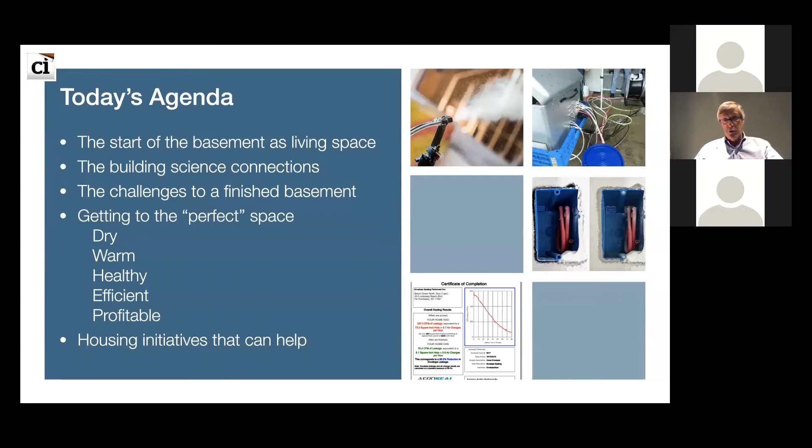That'd be great. So I thought I'd start with, and I have the wrong slide up, my apologies. But in terms of today's agenda, we're going to start with where we started with basements as living space, some of the building science connections, the changes to finished basements, the challenges to finished basements, and getting to what we'll call that perfect space: the dry, warm, healthy, efficient, profitable space, and maybe some of the housing initiatives that can help you with that. We'll work through these items in the next 40 minutes or so.

I always like to remind folks, what were we really starting with? The goal, of course, is to get us to solid, stable ground. That's where we'd like to get to. That means we need to know a bit about the soil capacities, a bit about the soil types, and there's been lots of research on that over the years.

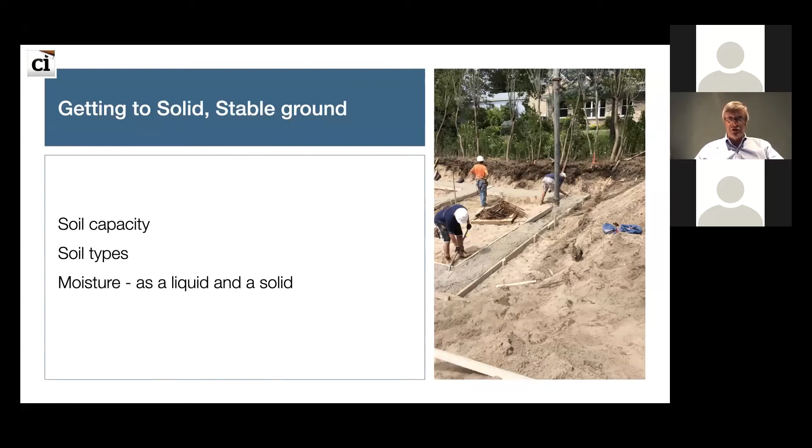The one I'm going to key in on, for hopefully obvious reasons, is moisture, both in liquid form and in solid form. Moisture really is a controllable risk, something we can manage, and it's very valuable to think about for the long-term success of livable basements. I'm not a structural guy per se, but I can certainly help you with the structural problems associated with moisture that we want to think about.

It all starts with this conversation of why did we dig the hole in the first place? Frankly, it was frost protection. More definitively, it's water that's turning into frost. Water, when it freezes, expands by exactly 9%. You have these soils, water in soils, the water expands, and that puts tremendous pressure on any immovable objects, or Mother Nature doesn't see them as immovable, but these objects called foundation walls, foundation slabs. Interestingly, although it expands 9%, it can actually move soils more than that through an effect called lensing, the way frost is built in the ground. I'll show you a slide on that in a second. So it can lift soils easily a foot or more.

Some of you may actually be in expansive soil conditions, where you get a similar effect with moisture—not when it freezes, but when it comes into contact with specific clays that absorb that moisture and also expand, in the order of 6 to 8 inches. People have seen that in Denver and other locations. So this idea that moisture in liquid form is our enemy, and moisture in solid form becomes an extra 9% we have to worry about, and the impact that has—that's why we dug basements in the first place.

We really have two strategies to control that impact: one, control the water, or two, control the temperature of the footings so they don't freeze. That's the history of digging the hole. Typically we find ourselves doing both. We think about surface drainage to minimize water, that impermeable cap to flow water away, then promoting free drainage below grade. And of course, a great partner on this call is the expert in that.

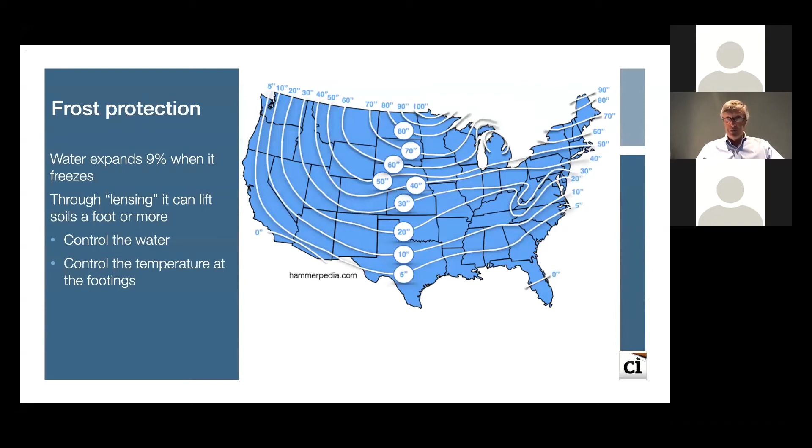Dirt has an insulation value, and that value changes a little depending on the soil and the compaction. Highway ministries publish these kinds of drawings because they're interested in frost heaving underneath highways and worry a lot about soil compaction. Typically, if I could put a number on it, it's about R2 per foot. So if you have 5 feet of dirt and the frost line is 5 feet, you're basically protecting your footings with R10 of insulation. Hopefully you find that interesting if you haven't heard it before.

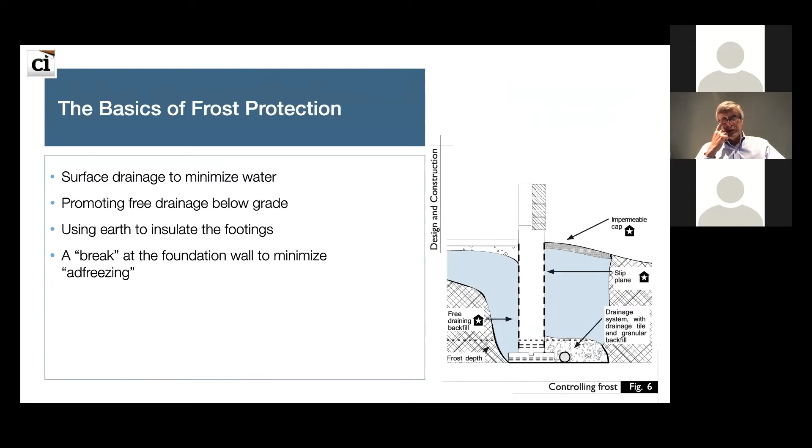Managing the water and thermal performance at the footing level doesn't necessarily cut it. You also have to worry about freezing, where ice on the above-frost-line portion can actually adhere to concrete and other materials and push it up, pull it up. That's called adfreezing. Here's a little example of that.

So you have these two combinations of adfreezing and ice lenses. The lenses exacerbate this, much like a lens focuses light at a focal point. The ice lenses focus these vertical forces and can actually move that soil more than a foot.

So we have to think about water in liquid form. We also need to think about slip planes to keep that frost away from the foundation wall so it's not pushing up on it. Water in solid form is a big problem for us in northern climates, and I'm assuming everybody on the call is in a northern climate tied into basements. If you're from the south and still doing basements, fine, you still need to worry about water in liquid form. But for the moment, I'm thinking about water in solid form, ice, and the damage it can do.

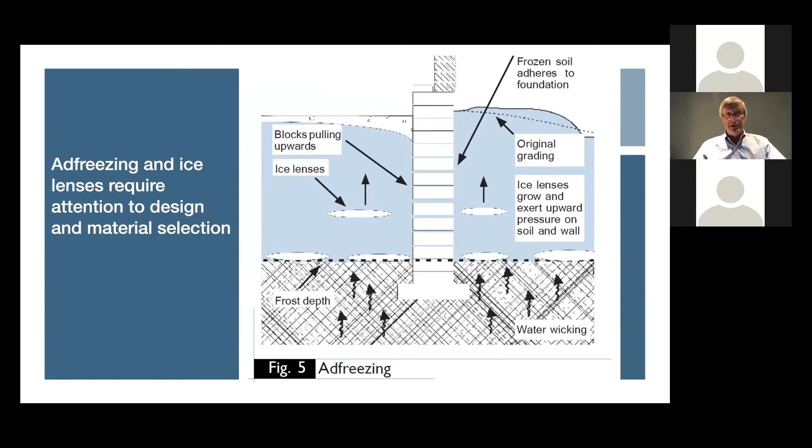That's historically why we went below grade. That's why we dug the hole. Of course, once we dug the hole, we found other uses for it.

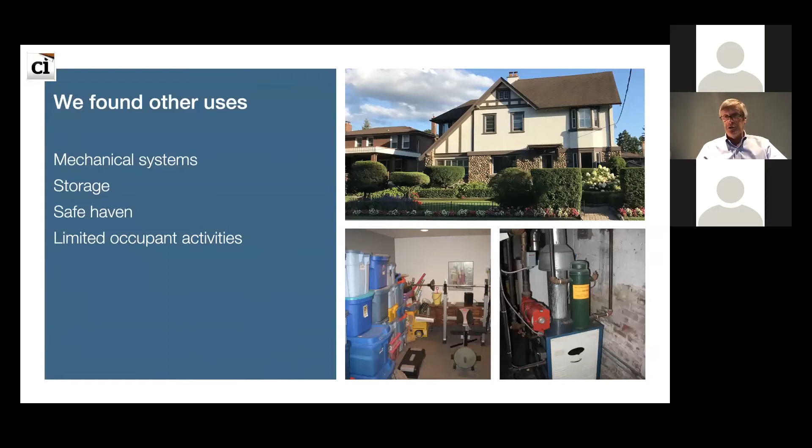So when you think about how we've struggled, or at least challenged ourselves, to use basements, could we do a better job? That's really what this session is about. And of course we have these new expectations: everybody imagines this living space with incredible finishes, ambiance, lighting, drywall, all the materials you might want to put into a basement now. We want it warm, dry, bright, healthy, and frankly adaptable, probably even more adaptable than above grade, because every customer wants something different.

Some want to put renters down there, some want pool tables, some want theater rooms. So we have to build or think about those basements, even if we're not finishing them. We have to imagine ourselves, imagine our clients, and what they're going to do with that basement over the years.

And probably a wider range of uses than most of the rooms upstairs that we have to think about. So those new expectations are pretty powerful. And when you think about your risks as builders, as architects, as contractors, it's all about water because we're below grade.

But then there's this comfort element. Certainly in northern climates, frankly in all climates, we're below grade, which means we're constantly damp and cool. The soils are cool, the soils are damp, so we have to think about comfort in those spaces. With my brother's house, they're not spending extended periods of time in that basement doing very limited activities. But with this basement, people could be there for extended periods, and therefore their expectations of comfort go up.

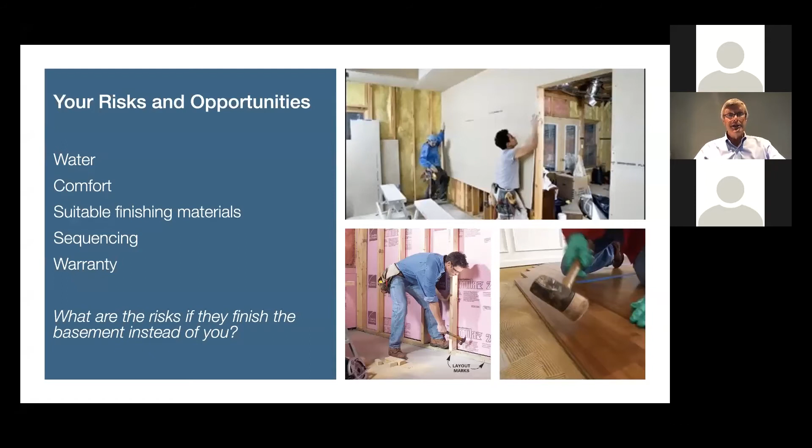So, risks and opportunities. Going back to the building science connections, you'd recognize the terms air, heat, and moisture flow. For this conversation, we need to think primarily about moisture. Yes, we'll talk heat flow, but the single biggest issue, as I already mentioned when we looked at the drawing on the right, is the number of moisture sources.

We're at great risk 24 hours a day. Above grade, there are many, many dry days—in fact, we haven't had a drop of rain for the last three weeks in my marketplace. So above grade walls, we're laughing. But below grade walls are still subject to moisture issues because that moisture in the ground is there all the time. So many moisture sources we have to worry about in that scenario.

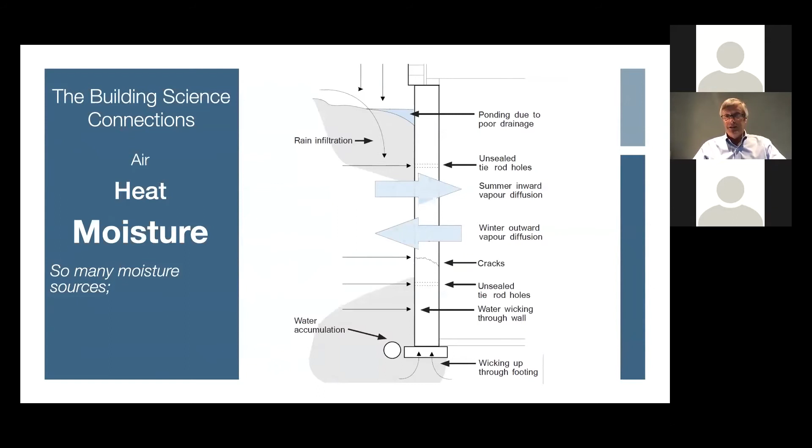And so the code has addressed that. The code says we have to think about moisture migration, and it basically looks at two items. One is damp proofing, which is primarily to stop capillary flow through porous items. We've chosen to use concrete, or concrete derivatives, in almost all basement and foundation walls.

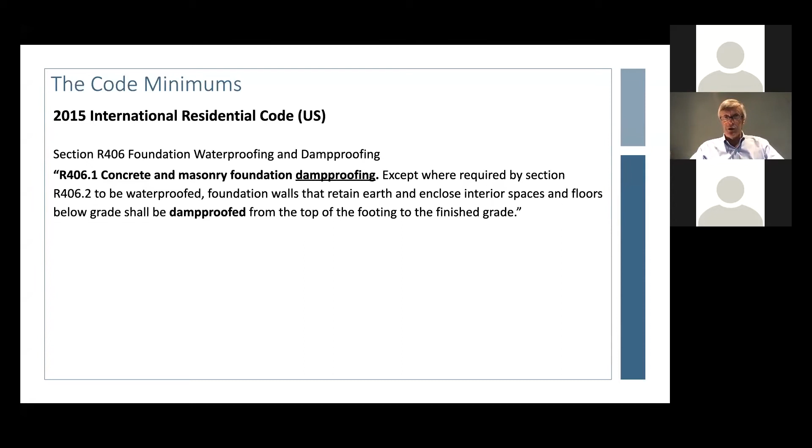Concrete wicks water, and we'd like to manage that. The concrete itself doesn't really mind the moisture, but we don't want it drying to the inside, so we're required to put up damp proofing—that's U.S. code, and I'm sure for Canadians on the call it's very similar wording. I'll be very blunt: this is the minimum. The minimum you need to do is stop the capillary flow coming through that basement wall. That's the important thing to keep in mind.

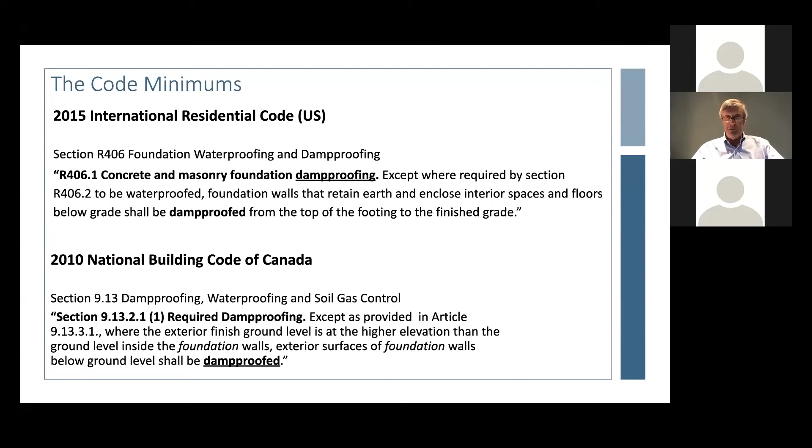In the building code, the IRC says if you're in high water tables or severe soil water conditions, you need to go further than that—you need to waterproof the wall, a different terminology than damp proofing, using some mechanism for stopping liquid water flow through cracks and so on. Interesting that it's not a requirement in all locations, just where high water table or other severe soil conditions are determined.

In Canada, we've done something slightly different. We recognized back in 2012 that damp proofing wasn't enough, because that year we started requiring full height basement insulation. The code officials and building industry realized that simple damp proofing wasn't enough to keep insulation systems dry. So in addition to damp proofing and waterproofing options, they suggested foundation wall drainage systems as a preferred methodology. Virtually all builders in my market, heavy clay soils in Ontario, Canada, about 50,000 houses a year, 90% of them use a drainage system such as Delta MS. You'll be familiar with that. Delta MS is code approved from a drainage perspective.

So the minimum is damp proofing. And I'm going to say to you, it's no longer good enough because you're insulating and finishing basements. If you're not finishing, your client is finishing basements, and it puts you at risk. If all you've done is stop capillary flow, you haven't gone to the extent you really need to. Code's not enough because there are so many moisture sources.

If I cued you in on this slide, when you think about damp proofing, which of those would simple damp proofing actually stop? Frankly, the summer inward vapor diffusion about a third of the way down, okay, I guess we could stop that. The capillary water flow through that wall we could stop, but it wouldn't necessarily bridge cracks or unsealed rod holes, as you see there. It certainly wouldn't stop water wicking up through the footings because we don't put damp proofing there. And it wouldn't stop liquid flow getting through cracks from rain infiltration and so on.

So capillary flow, damp proofing, is a minimum requirement. And then we need to think about doing a better job. That's where we think drainage is a more appropriate answer when we look at how we're upping the ante with respect to how basements are going to be finished.

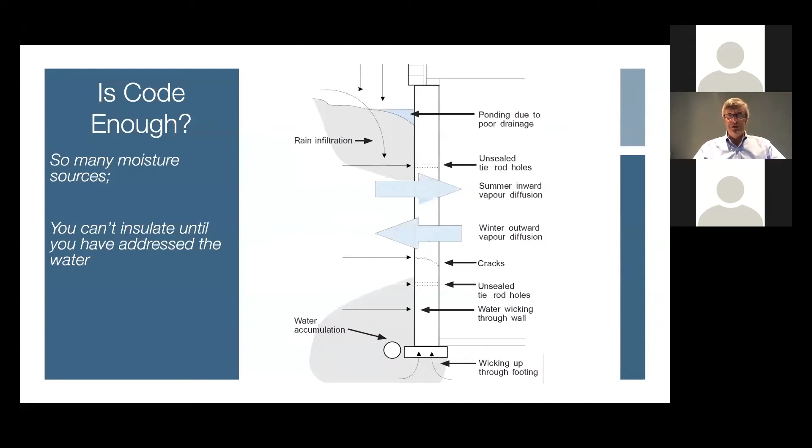I'm going to use this statement: you can't insulate until you've addressed the water. This was a phrase we often used. We were doing indoor air quality audits for a housing authority here in Canada, and we had to tell people in their basements that they should not use their basements as living space. This is an existing basement. They should not use their basement as living space, they should not insulate their basement wall. I've told my brother Jim, do not insulate those basement walls. They are not suitable because you haven't managed the moisture in those walls.

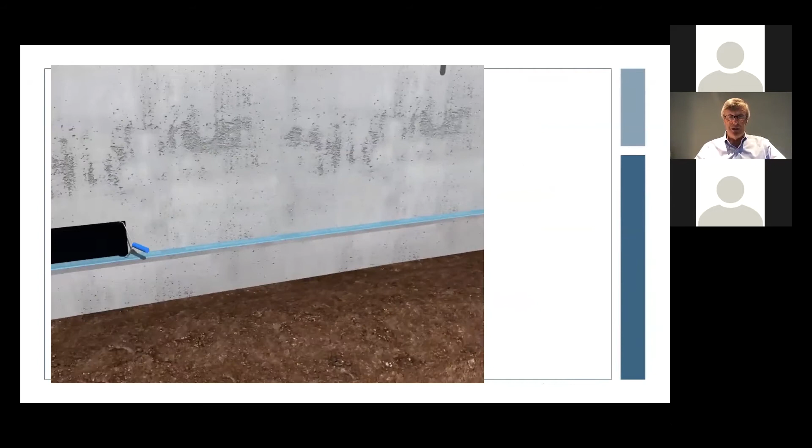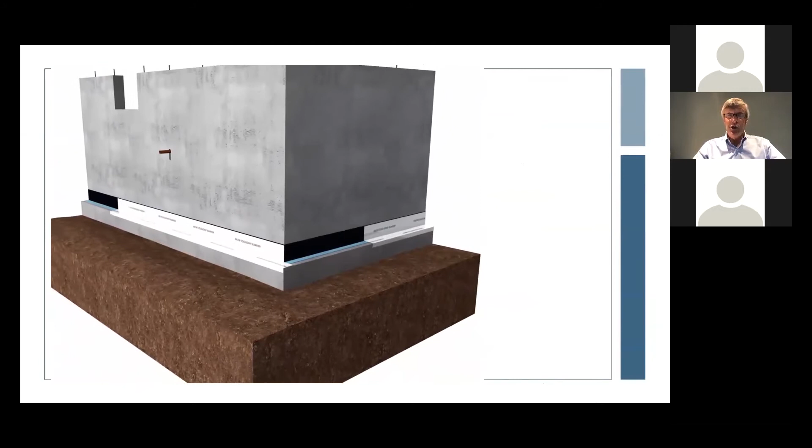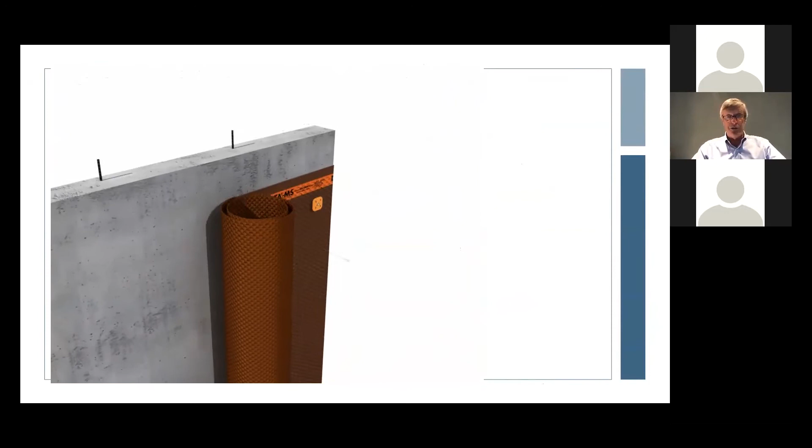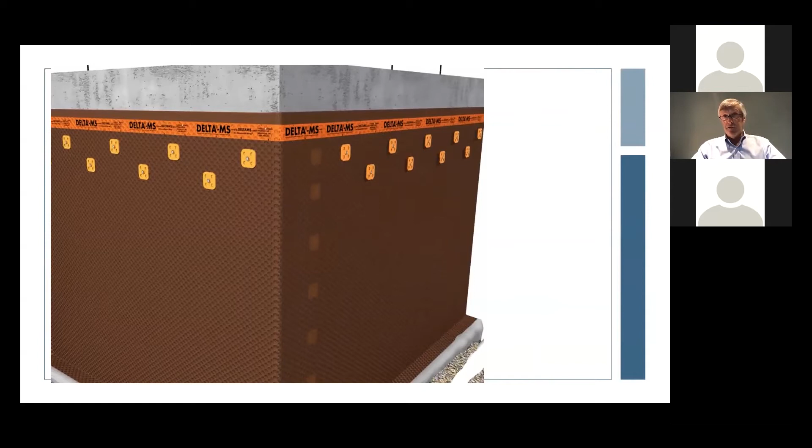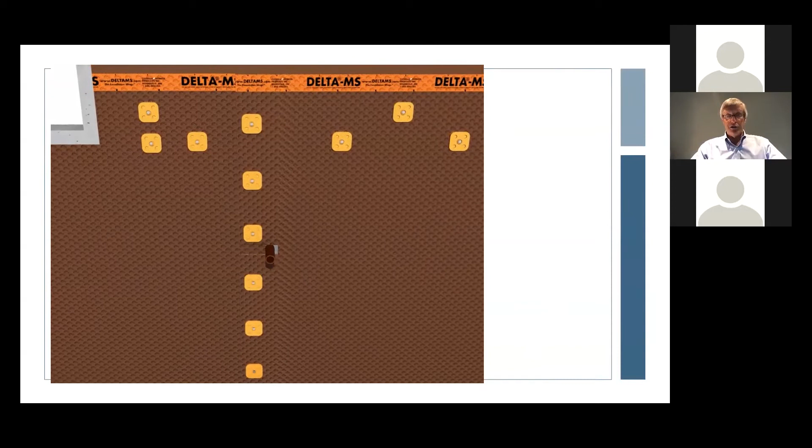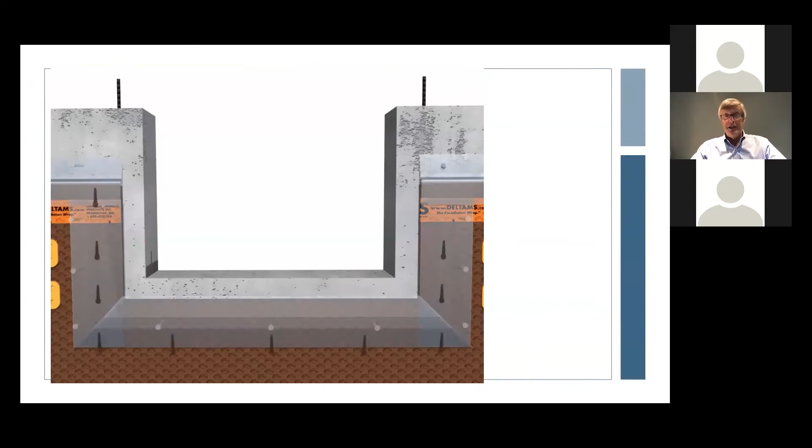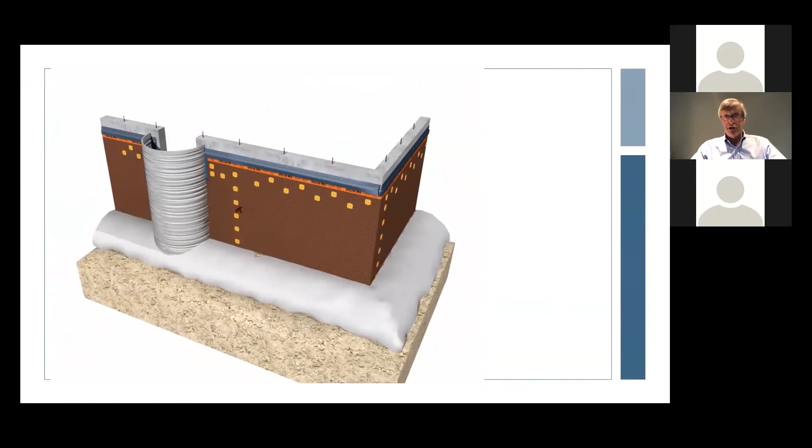Interestingly enough, we know concrete cracks. That was one of the major studies done in Canada years and years ago. The study came back saying concrete cracks, and we're like, yeah, of course it cracks. There were two ways to solve that: one was to try to stop the cracking or fix the cracks, the other was to do the drainage. We realized that holes in the concrete aren't a problem if it's easier for water to drain down than it is into the wall. So this comprehensive drainage system you're seeing here directs that water away to the footing.

Peter: Well, first of all, thank you, Gord. That sounds very Canadian to do a study to find out that concrete cracks. Attaboy, we probably have a study to find out that water's wet as well.

Yes, exactly. So since you're on the topic of foundation walls, maybe you could comment on using this when you're not using a poured concrete wall. Sometimes there's ICF and sometimes there's block. Thank you for that.

Block is even more susceptible, even more important. There's inherent holes in the concrete block, just the mortar joints and so on. So it's absolutely vital that we get a drainage layer on there.

And so you would still put a drainage layer. Rather than fiddling around with a damp proofing layer that you don't know if it's compatible or not, or a peel and stick on an EPS foam isn't compatible, I actually prefer drainage layers. Even more important to apply drainage layers onto ICF. And then you've got yourself a really well insulated, water managed foundation.

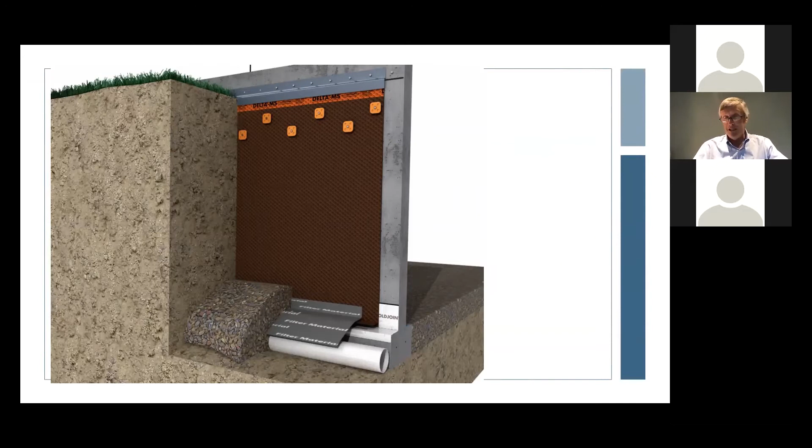So thanks for that question, interjection, Peter. That's very helpful. So this idea, when you think about solving the water issues, all of the water sources, now you have protection against all of them. You stop the capillary flow coming up from the footings. In this case, you're seeing underneath the slab as well, stopping that capillary flow, vapor flow. You've got drainage on the outside, which means any liquid water is drained down to the footing drains, and you've stopped the capillary flow through the walls.

So now that you've done that, we can get ourselves with these very simple, effective investments. This happens to be the house that I'm sitting in, the footing barrier being applied to that footing. And I found it pretty interesting. The contractor who'd never used it before wanted to feel it. What's going to happen with this product? If you haven't tried this product, seen this product, I think it's a pretty brilliant product. Very simple to apply. We've shown it in other sessions, so I won't go too far into it.

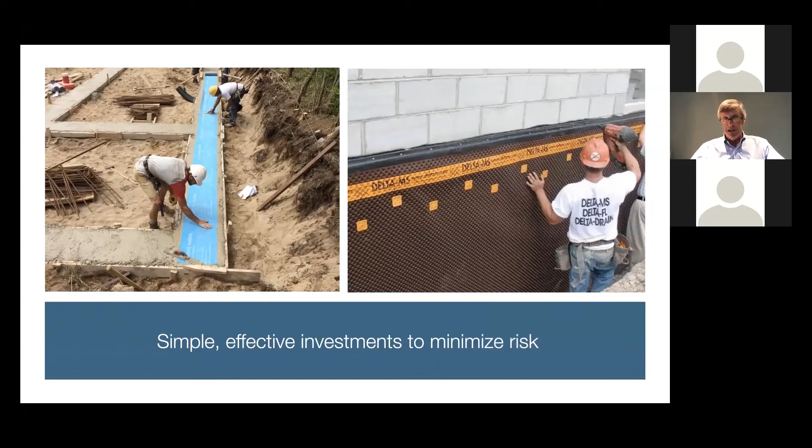But my point here is, there you can see on the block wall, on the right-hand side, the idea with these very simple investments, very early in the construction phase, now you get yourself covered for the rest of the build. We use that tagline, solid foundation for a solid structure, a solid start. And this gives you the confidence that now I can go almost with impunity and do whatever I need to do, want to do in that basement, and provide really nice livable spaces. So that's really the key.

And then as we move, we've solved the moisture. Solved is perhaps too strong a word. There are still going to be soil conditions, still going to be situations where you have to go to greater lengths. But for the most part, for most of the builds, those two simple investments really help you from a moisture management perspective. And now we can think about optimizing insulation.

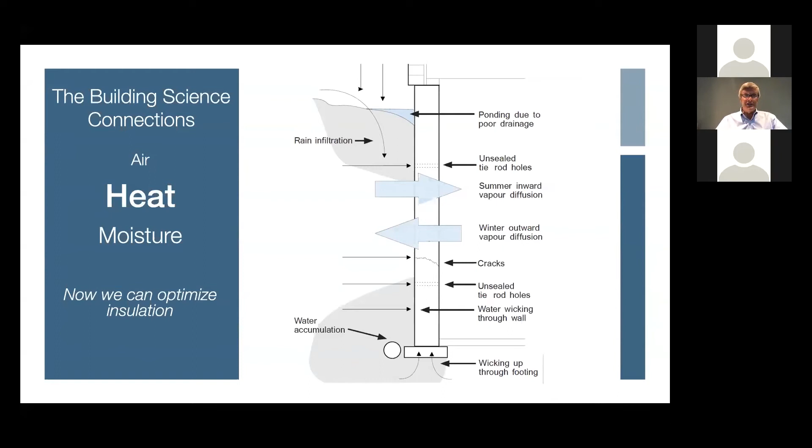And you might fall into the trap. I know people on this call are educated enough that they would understand this isn't a case of people always thinking that heat rises. Well, it doesn't rise, heat moves from hot to cold. And there is heat loss through a foundation. These figures, by the way, come out of that study I mentioned, a big study that was done back in 2005 and a precursor to that in '97. But this idea that the heat flow goes from the left through the house, through the slab, down through the soils, out to the cold spot, which is Mother Nature. So we just need to get our understanding right.

And interestingly enough, when you think about that heat flow, it gives you opportunities to solve it in different ways. We don't really care where the insulation goes. It literally could go under the slab, on the interior of the foundation wall or frost wall, on the exterior of the foundation wall, or even horizontally below grade, just under the grade on the right-hand side. So we just need to impede or stop that heat flow.

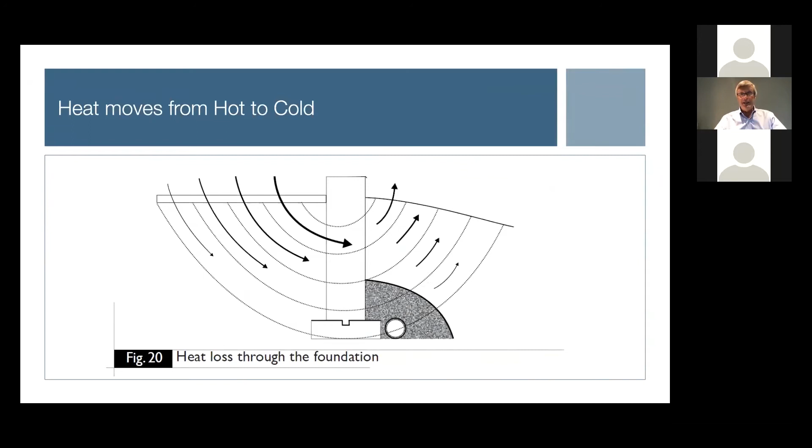And remember, dirt itself is an insulator, about R2 per foot. Of course, we have much better insulators than that, insulation at R5, R7 per inch. So let's go ahead and be more effective than Mother Nature at stopping heat flow from our basements. It's a fairly simple little drawing. And if you're wondering, does it mean a lot? The answer is yes. If you notice in a HERS index, this is US, a HERS rating, HERS index house, a typical house in a cold climate.

In a cold climate, I'm talking climate zones 4 and above, basements account for 25% of the total heat loss of a house. And even when you drive down to a lower HERS rating of, say, HERS 50, typically builders don't do the basements. They do everything else first. They get the air tightness done, they do better walls, they do better windows, but they don't necessarily take the right stab at basements. And I'm going to make a case that basements are the most cost-effective place to insulate.

As long as you've done the water management first, basements are the lowest risk, lowest cost way to bring down the HERS score. It's not the only thing you would do, but somewhere along the line, I'll actually show you how much insulation to add to make this work for you.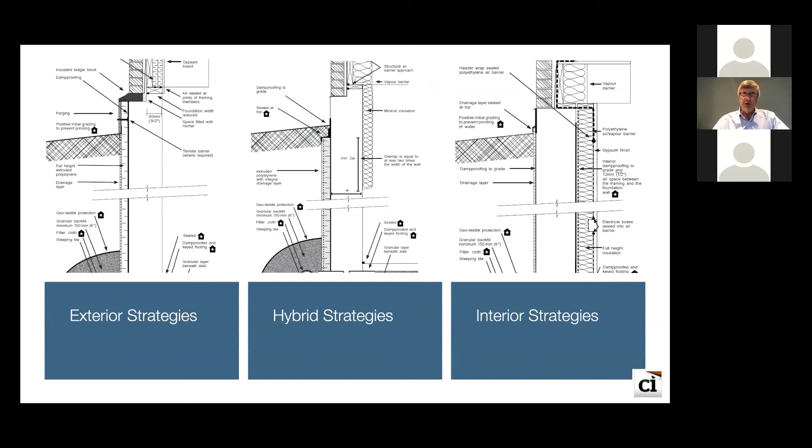Minnesota very clearly went towards exterior insulation, and we can learn from that. It's a great opportunity to think about where is the best place to put the insulation. If you're worried about sequencing, worried about whether this is going to impact the further construction of your house, if it's all done on the outside, you do that before you backfill and you're good to go. You've got things done, so it can be really helpful.

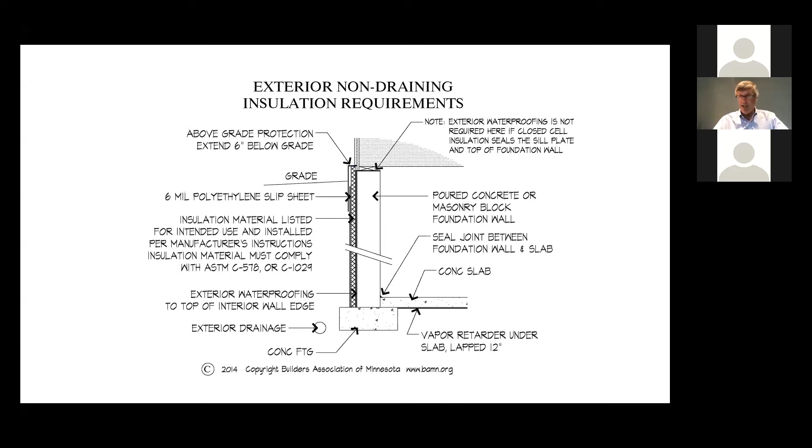This is actually a drawing from Minnesota, copyrighted by the Builders Association of Minnesota, showing how you do exterior insulation on the outside - R10, R15, depending on what section of the code you're working under. The issue always becomes, how do I provide above grade protection? And they have various strategies to do that. I'll highlight that in just a second.

I prefer the foam products on the outside with a specific drainage layer. What's really nice here, it keeps the concrete warmer from a comfort perspective, a moisture perspective. That's always nice. It helps reduce water entry because of the water management layers that we have. Some would say it's a challenge to finish above. We do need to think about that thermal bridge down at the bottom through the footing - what are we going to do with that? There's still a thermal bridge there, but that ends up being a relatively small portion of the heat loss. Even in a net zero building, you might not need to attack that.

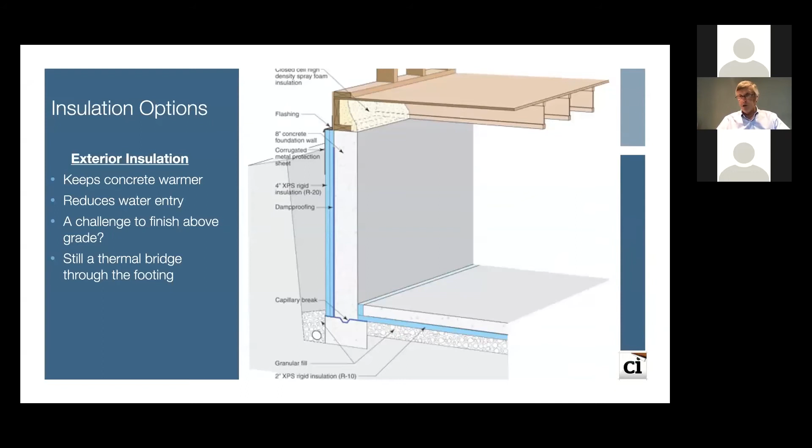Now, if you're in Alaska or something, it might be different, but that tends to be a really good option from the outside. We often get asked right at this point, Peter, where does the water management layer go? Where does the drainage layer go? Dörken has provided some really nice details. I'm not with Dörken - most of their details would show the drainage layer to the inside of the foam. That is: concrete, drainage layer, foam on the outside of that.

And you're going to have, well, I've got a little 3/8 gap, I have to step that - well, they have details to figure out how to do that. In fact, in this case, you extend the drainage layer all the way above grade and use that so that you've taken into account this 3/8 inch gap that otherwise might interrupt the foam. This fits really nicely with a net zero perspective of houses. Typically, people are using insulated sheathing on the outside of houses, and now it lines up really nicely. So that would be a preferred detail, in my opinion.

In my opinion, R15 isn't enough in Minnesota if you're trying to get to net zero. Not if, but when you try to get to net zero, we need a little more than that.

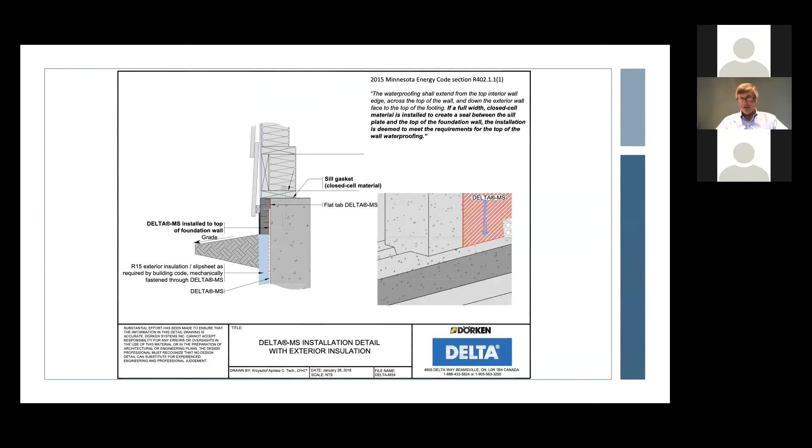These products also manage vapor diffusion really well. We have vapor diffusion in the wintertime, in cold climates, going from inside to outside, and these products minimize that, managing it really well. Of course, depending on where you're from in Canada, this is a challenge because our code does not allow us to leave this foam exposed.

So you have to come up with a methodology. That's why I would say go ahead and finish your basement, take away that risk, finish it with whatever material you want, but a drywall fire-rated finish is what you'd like to get to. So I see it as kind of a moot point because I have to cover the foam anyway. Offer it as a finished basement, you'll find it's a pretty nice way to go.

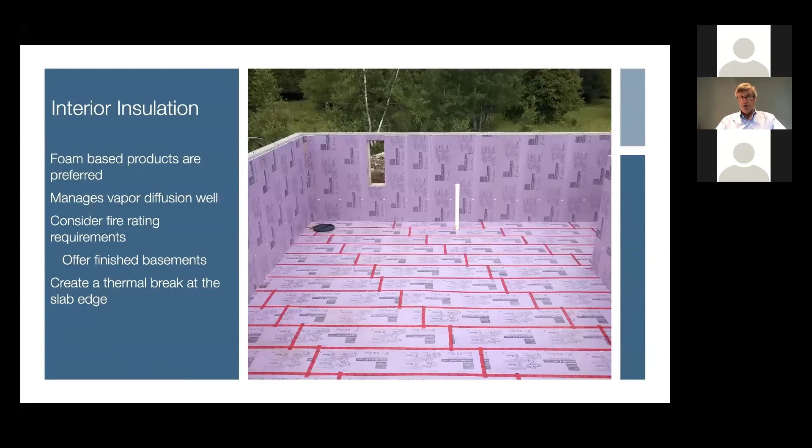You want to create a thermal break, and notice how they've done it here. They've actually done the foam on the wall before they poured the slab. Now, some would say that's a little out of sequence, don't know if I can get my guys to do that. But even if you just put a little bit of insulation, foam insulation, when doing the under slab, ran a little 6-inch piece up the side so you could pour that floor and get that thermal break in right at the beginning, that would be pretty useful.

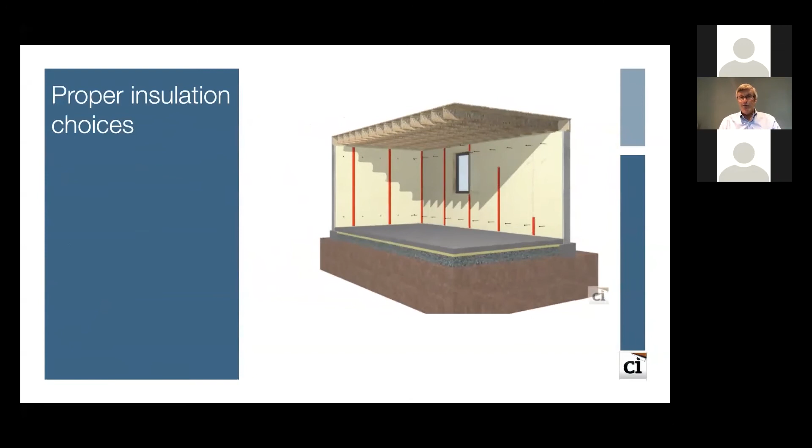From an inside perspective, we really like this animation, or this methodology. We like the animation, of course, because we drew it, but this idea of foam on the inside is really nice in a retrofit situation, a very safe way to insulate.

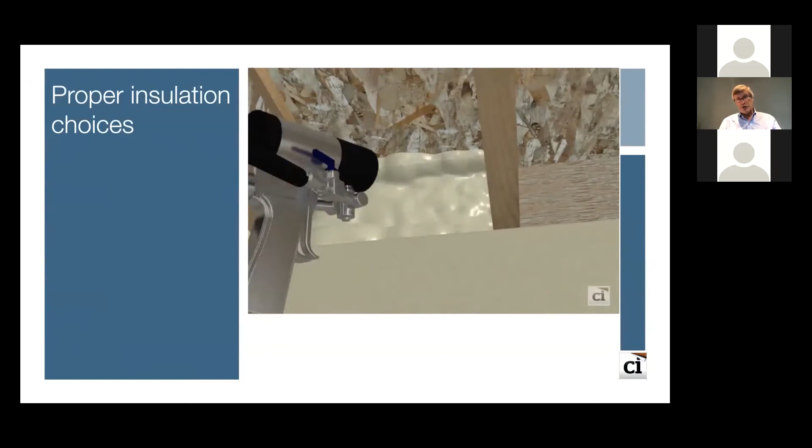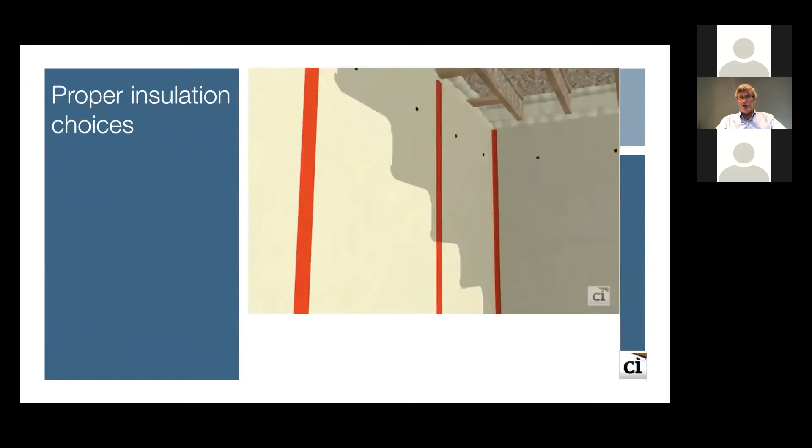Now, you still want to make sure you've got good water management. I'm showing spray foam here in the cavity. It doesn't have to be spray foam, but it's a nice way to go. And then just this XPS, we are suggesting XPS foam in this location. EPS is maybe slightly too permeable, the polyiso foams are too impermeable, so we like XPS with its semi-permeable quality.

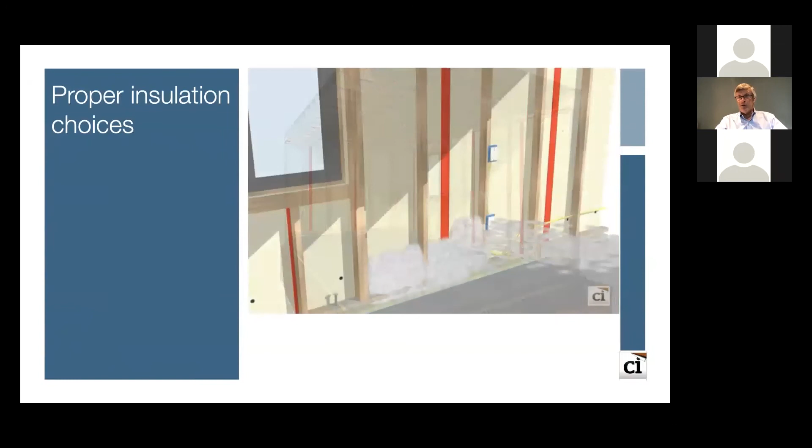And now we're putting a stud wall in front. You would say, well, couldn't I just do it all in foam? And the answer is, of course, do it all in foam, that's fine. But from a cost effectiveness standpoint, if you're trying to combine fibers, because fibers tend to be more cost effective than foams, this is a really nice way to do it.

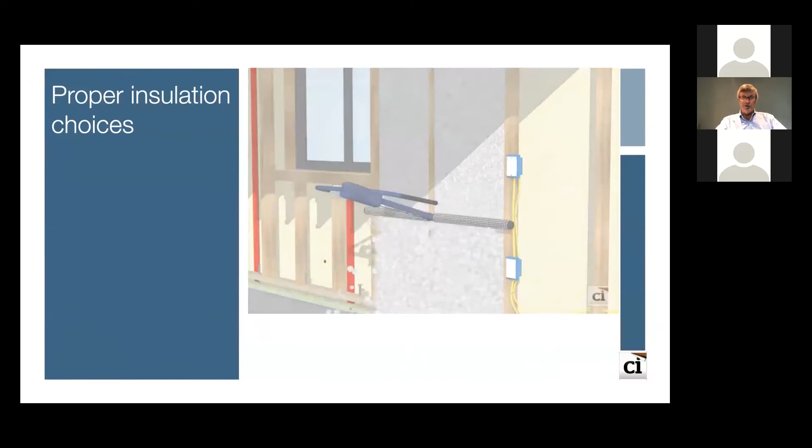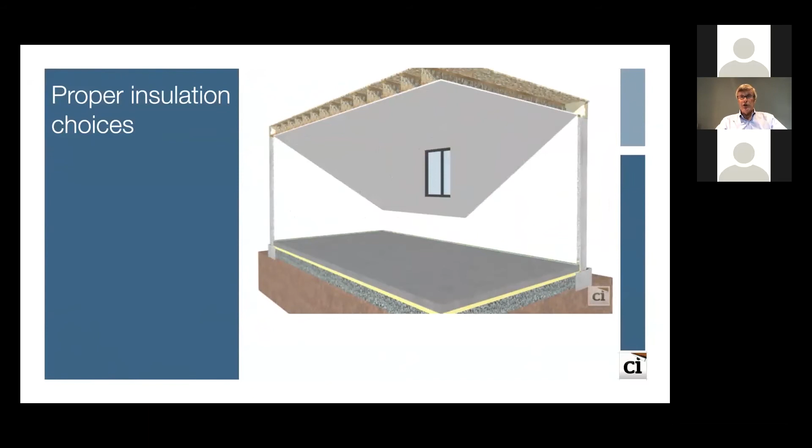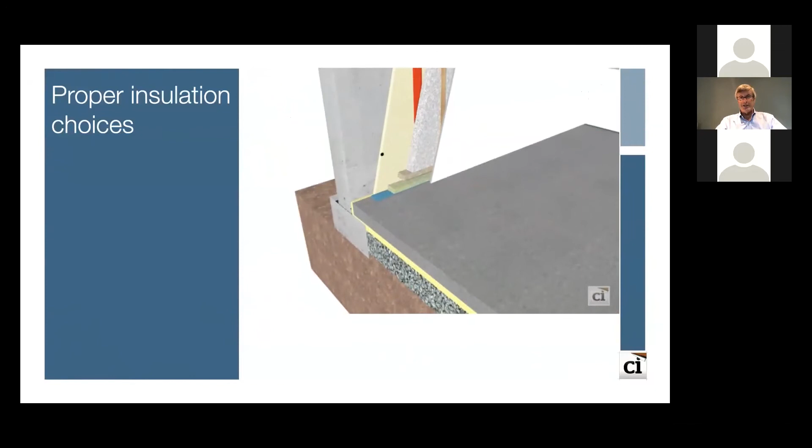And now you have yourself this really nice, warm, dry basement wall. Again, still imagining I have my drainage layer on the outside—there's really no substitute for that. But drywall, no, for Canadians on this call, no vapor barrier. Use the foam, show the foam as being your vapor resistant, vapor retarder in that wall assembly, and it works really, really well. This is studied at University of Minnesota, University of Waterloo, and shown to be a very good option in retrofit.

And even in new construction, I would like to mention this idea of a hybrid option. Remember I said Minnesota probably doesn't have enough insulation at R15 once you get to net zero. I kind of like this one, that you do the below grade portion on the outside, and then you insulate on the inside. By all means, insulate full height. What's really nice here is that foam on the outside creates a much warmer concrete.

And now you can go ahead and put in a modest amount of insulation. It doesn't have to be a lot, R12 on the inside, very cost effectively. You're going to put up a stud wall anyway, so just go ahead and fill that cavity. It doesn't have to be a lot—Minnesota would say you're allowed R11 or R12 in that cavity, and that ends up being a pretty good number.

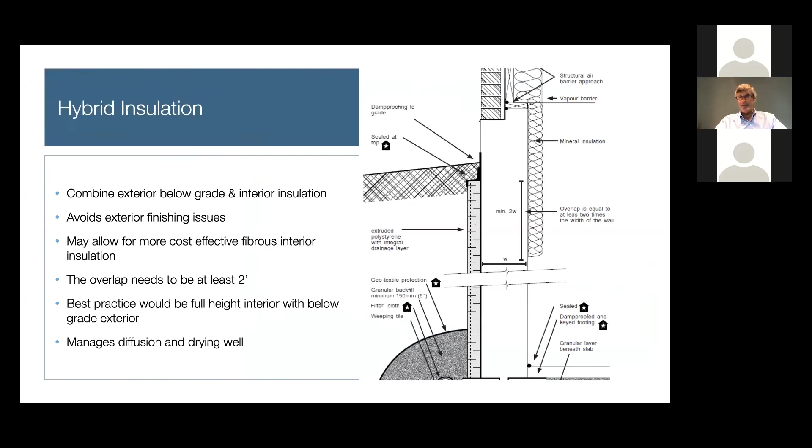This means you don't have to finish to the above grade. You do want at least 2 feet of overlap between the inside and outside insulation, but since you're building the stud wall anyway, just go ahead and insulate all the way to the floor. This manages diffusion and drying really well, while still allowing some drying to the inside. That ends up being a really nice basement wall system.

I do want to mention this, though. I'm just showing an old rubble foundation. Notice on the left-hand side, those are the thermal gradients without insulation. Now notice what happens to the thermal gradient when you add insulation. Perhaps not oddly, but interesting, when you insulate the wall full height, the frost actually goes deeper. That isn't a big deal, but you will find the floor gets colder.

So if you don't insulate your slab, there's a synergy to insulating both the wall and under the slab. If you don't insulate under the slab, oddly, in cold climates, clients will say, you told me I have a great, well-insulated basement, but they'll notice the slab is actually cooler than it would be if there was no wall insulation. So really the point we're making is you want to do both, from a synergistic perspective.

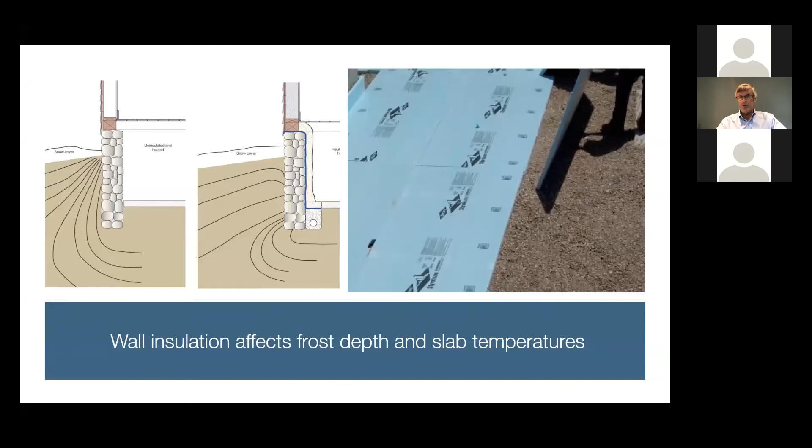This was the conclusion from that study I mentioned, and I'll just read these two points. From a builder's perspective, it may in fact be more profitable to construct what they deemed a Class A basement, with a full drainage layer and full height insulation. Just so we understand this, it's more profitable to put in drainage and full height insulation because it simultaneously reduces the cost of callbacks and improves your profit margin from that basement upgrade, more than any other basement system. So people say it's going to be more expensive, but it actually ends up being more profitable. Yes, more expensive, if you will, but more profitable for you.

Homeowners are going to finish that basement anyway. All we have to do is help them bring those dollars forward. Somewhere in the next 2 to 5 years, the evidence shows people finish their basements in some manner, shape, or form. So you might as well help them pull those dollars forward and find a way to do it that's cost effective for them.

Interesting enough, for all types and sizes of basements, this study found that interior insulation was in fact more cost effective, but most importantly, to a level of R20. That is, R20 had a better life cycle cost than R12. So don't stop at R12 or R11, whatever your code says. It's actually more cost effective in life cycle cost. Yes, more expensive to apply, but lower life cycle cost to go all the way to R20.

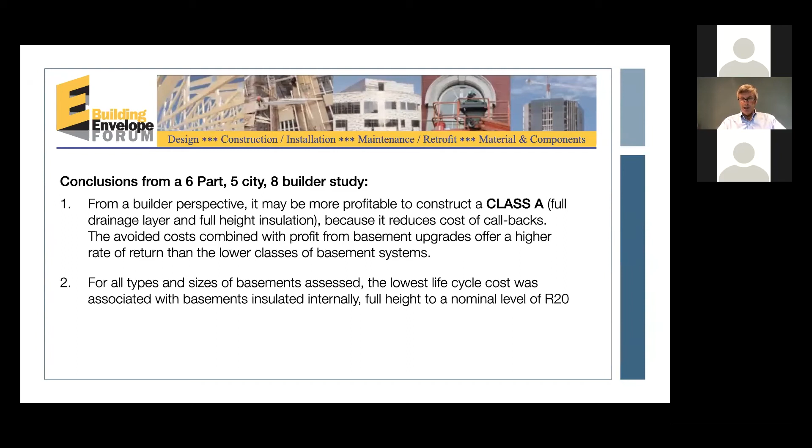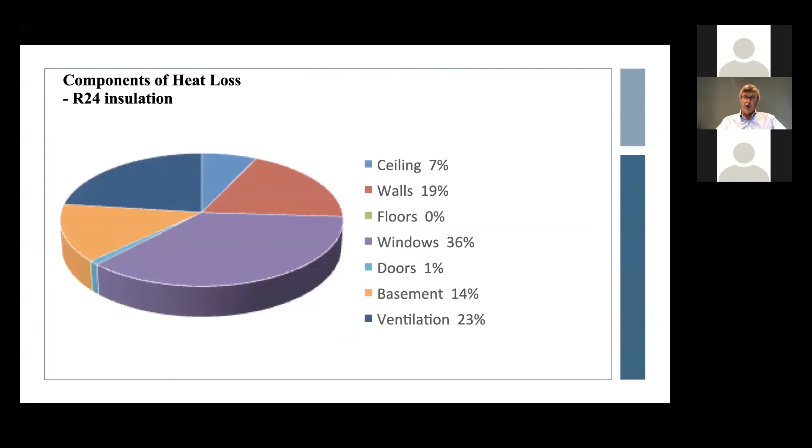At R24, the basement is now only 14% of the heat loss. In other words, by simply adding an extra R12 batt to the inside of a basement wall, pull the studs off a little bit, you can see why this is so cost effective. The studs are already there, you already have folks there, just go ahead and put more insulation in that wall. I'd say do it with foam, an inch or an inch and a half of foam on the inside, very cost effective to get you where you want to go.

As I finish up, here's what you need to know, just a couple more minutes. When you get to, and I use that term advisedly, net zero, you're all going to be doing it in the next 10 to 15 years. Some of you are already doing it.

You'll find in the climate zones we're targeting today, zone 4 and above, R20 full height basement insulation is what you want, with R7.5 under the slab. Most software isn't going to show that as being a big benefit, but I'm going to have you do it for two other reasons. You'll do R7.5 because less than 7.5 is really hard to work with. R5 breaks too easily.

So R7.5 is 1.5 inches of XPS. Some would put down 1 inch of spray foam, which would be fine, another R7, but go to 7.5. The second reason is it warms up the basement floor, which gives you more flooring choices without foot discomfort. And you still need a thermal break at the slab edge.

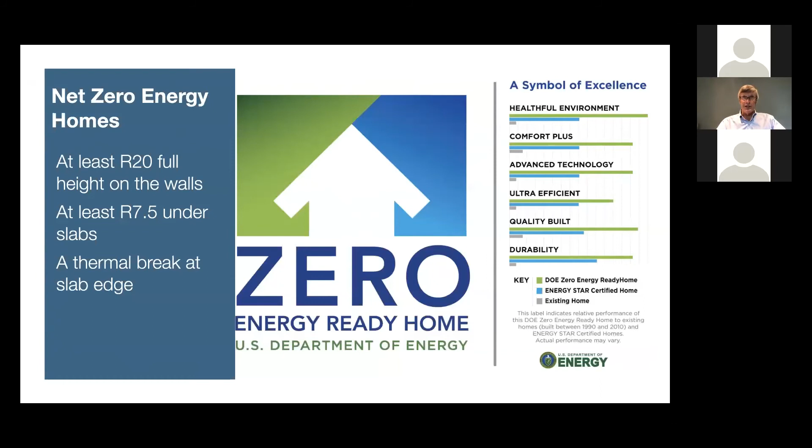So every net zero house we've worked on has a minimum of R20 on the walls and at least R7.5 on the slab. We said we'd try to get you to our idea of perfect, and this is where we feel it is. This is actually the experience of my partner, Andy Oding. This was the drawing they did for their folks to show what their wall was going to look like.

On the wall, they did 1 to 1.5 inches of XPS foam, then R20 batts within the cavity with the studs pulled off a little bit, and 2 inch foam under the slab. You'll notice they didn't skip that thermal break—well actually they did, just R5 thermal break at the slab edge, but not on top of the footing. So they were very successful with this.

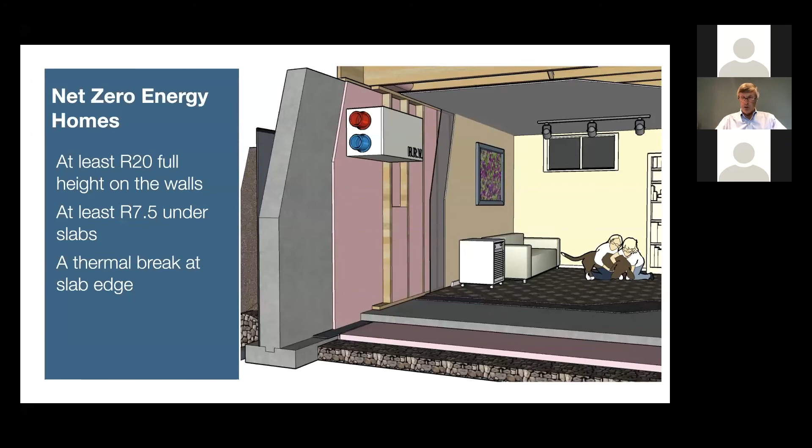I'll show you why in just a second. This was the consumer piece they created when they did this basement—they called it the 'form to function basement'—and they got tremendous feedback, with fewer callbacks.

So here's what they did. They said, if you're going to finish your basement, this is the only way we're going to do it. And if we don't finish it for you, we're going to tell you that you can't finish your basement for at least 2 years. That's hard to put into a contract, but they told people if you finish it within 2 years, the basement isn't dry.

So they really encouraged people to let them finish the basement. They found they had fewer callbacks, made greater margin on the basement than on many other aspects of the house, and met their energy program requirements—at that time Energy Star, now Net Zero. Most importantly, they had great consumer acceptance and uptake. They went from not wanting to do basements to finding it very successful, and their salespeople encouraged it. I thought it was a really cool idea to think about.

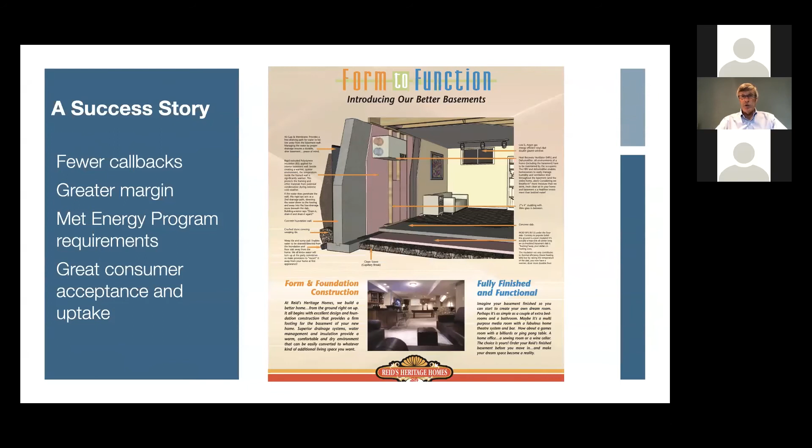I need to mention one other thing before I finish up, and that is plan for dehumidification. All basements in cold climates need dehumidification in spring, summer, and fall. In the spring, our soils are wet and damp, our air is cool and damp, and basements end up needing dehumidification.

The products on the right are whole house dehumidifiers. The product on the left—you could just go buy a portable dehumidifier and give it to your clients; many builders I know do that. The one on the left is a cool in-wall product if you're finishing the basement anyway, made by Ultra-Aire out of Minnesota. It's a really nice, dead quiet product with a built-in dehumidistat, drained—you pipe it to a drain—with air intake at the bottom and air out at the top, and it manages that moisture level.

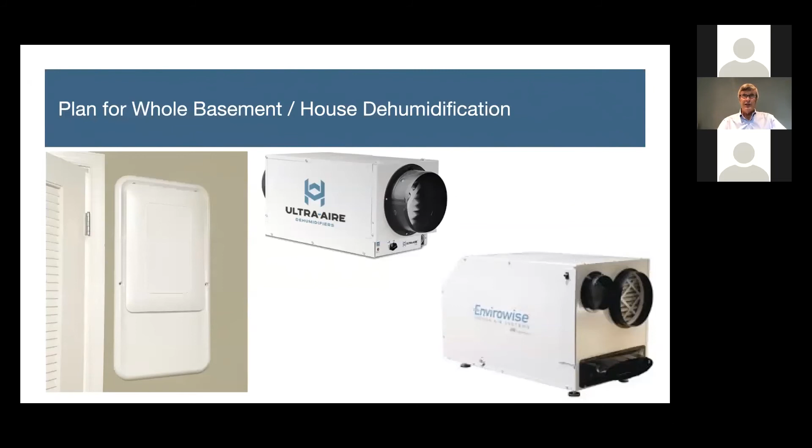You need to set it to 50%, that's where you'd like to be, plus or minus 5. So no matter what you do—you've done great drainage on the outside, you've done good insulation—I'm still saying to you, put into your scopes that you're going to put in a dehumidifier, or require people to run one. And that about does our time.

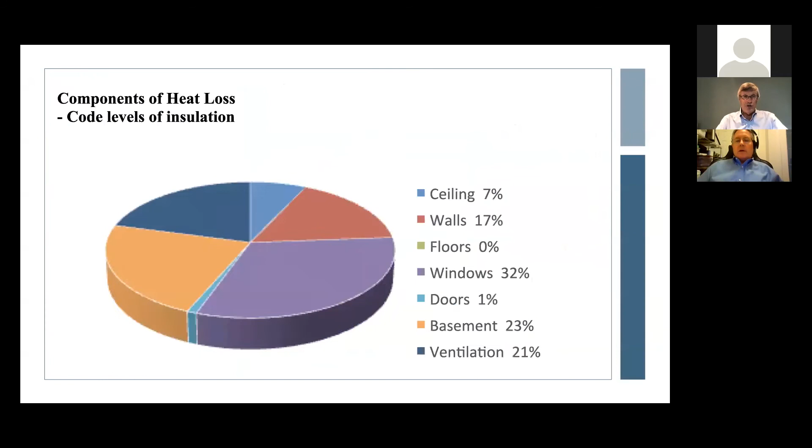So I'm sure in your business, Gord, you've dealt with crawl spaces numerous times, both conditioned and not conditioned. How would you recommend people think of crawl spaces? Yeah, crawl spaces are really basements for short people. That's the way they should be looked at. Build them the same way that you build a basement, the same drainage.

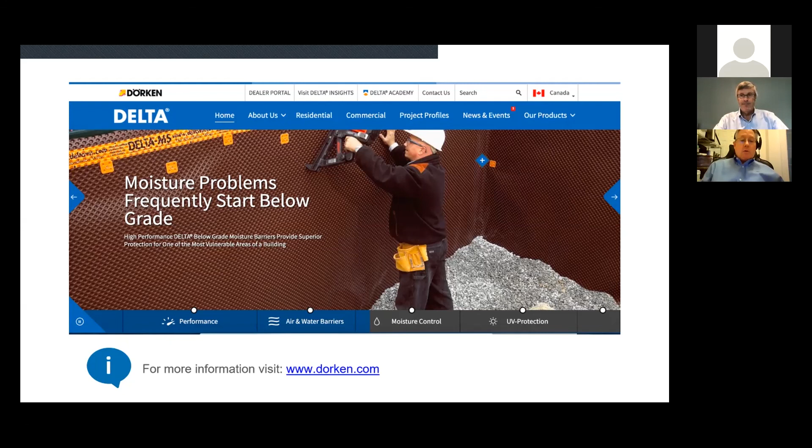Just a couple things to help sum up the day. Dörken manufactures Delta MS, a below grade damp proofing and drainage layer. You can get great information on our website at deltams.com or dorken.com. Delta MS is unique in that it has a center layer of recycled polyethylene with 2 layers of virgin polyethylene on either side. That gives you the dual feature of being environmentally friendly with the recycled content, but adds the durability you can't get from recycled alone by putting virgin on either side. Again, it meets all building code requirements, both in Canada and the US.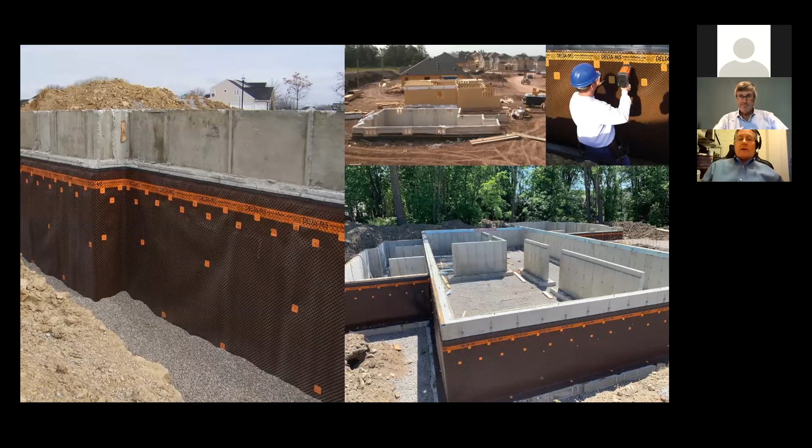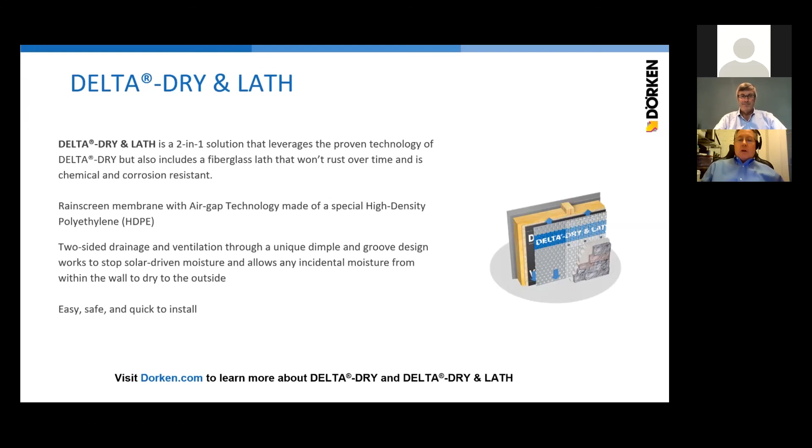We also make, out of high density polyethylene, Delta Dry and Lath, which is used above grade for drainage and ventilation behind reservoir claddings like manufactured stone or stucco. It goes on in a 2-in-1 process, meaning you put on both your engineered rain screen and your lath in a single step. You don't need the heavy duty metal lath to cut - it all goes up in one step, and that adds a lot of drying reserve to your above grade wall.